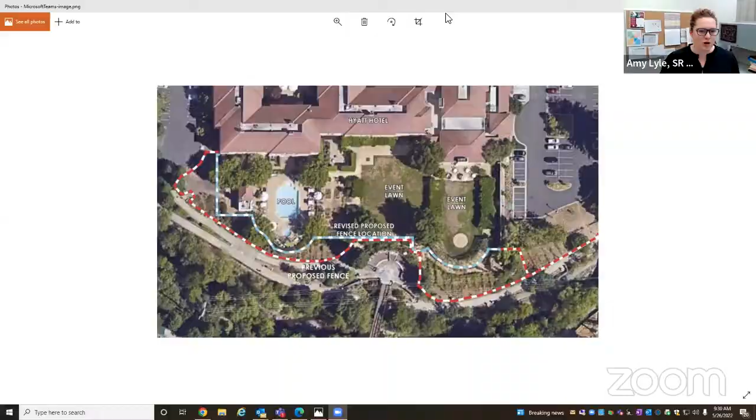It's really nice getting feedback like this, Amy. Right? I really appreciate it. Great. Well, we'll continue to do that. And I think with the more controversial projects, we'll continue to write up a memo to forward on to the review authority that will occur after you.

And one more point of clarification that I forgot to mention during department reports is we are going to move to having memos describing the projects before you versus staff reports. So we're going to try this out. Let us know if it's the right amount of information and detail. Because your committee sees projects in a preliminary way, a lot of times it's very conceptual at the time that you're reviewing projects. It is challenging to write a full staff report and provide that full analysis because strategically this committee, you want to be early in the process to be able to form the comments for staff for their review. So we want to go to memos, and that will help streamline the work for staff as well.

And just let us know at any point if there's not enough information, or before the meeting, we can always, of course, anticipate what information you need or questions, so we can get the right amount of information for you to be able to provide comments. So on today's item, you'll see that change occurring where it is in memo form versus staff report. Well, thank you, Amy. That's very helpful. Any other questions on that?

Yeah, I do, Steve. So I'm looking at it right now, and since this is kind of a short memo because it's just proposing, it's a project we've seen before, and there's just some changes on it. The information that pertains to our committee, is that information going to not be on there anymore? It is. So you mean we should be including the watershed and the watershed map? No, I don't mean that. I mean, there's specific things within the creek manual that apply to this project. And then there's information about setbacks, but this one doesn't have that. But when it does have that issue, is that going to be in the memo?

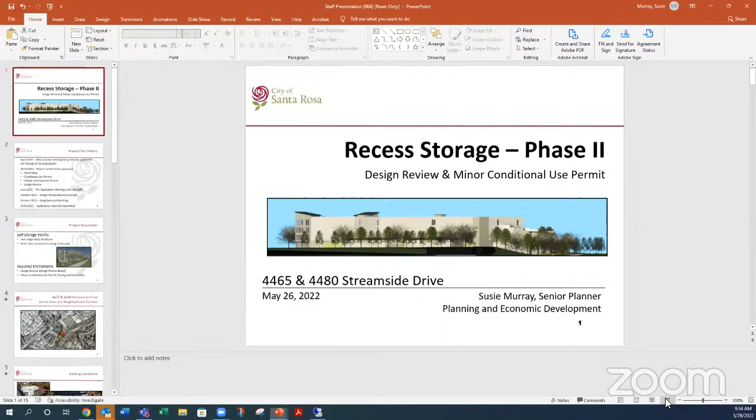It looked like you were looking at my calendar from my screen.

Anyways, before I get started, I wanted to comment on Steve's updates. First, when I heard the creek ribbon cutting, it made me miss being in the water department, being part of the water department team. But then I'm so happy for Alistair, and he will be so missed. I've done a couple of creek cleanups with him myself, and got a tour going underneath City Hall, which was some amazing nasty stuff, but it had some amazing art as well. And Alistair was just gifted in touring us through there.

So anyways, with that, I'm going to bust into this and say good morning, Chair Rabinowitz and members of the committee. The project before you is the recess storage phase 2, we're calling it. It is a project that was before you once before with a different address. This is a new street or an extension of an existing street now. As a result of the previous project, it's at 4465 and 4480 Streamside Drive. It was before you back in April of 2019. At that point, it involved a large 4-story self-storage facility and 2 residential units, one facing the creek.

And that property is really the one that is the reason that we're before you today. That project involved a conditional use permit, a hillside development permit, design review, and of course a map, which is how we have extended the street. This application that revises that project came into us last June. Actually, that's when we first saw it with staff with a pre-application meeting, and we actually got the applications. It's kind of been a spread over 2021 and 2022 because there were some clarifications needed on what applications and materials were required. The Design Review Board has seen this on a concept basis as well. And now we're looking for comments from you on a concept basis.

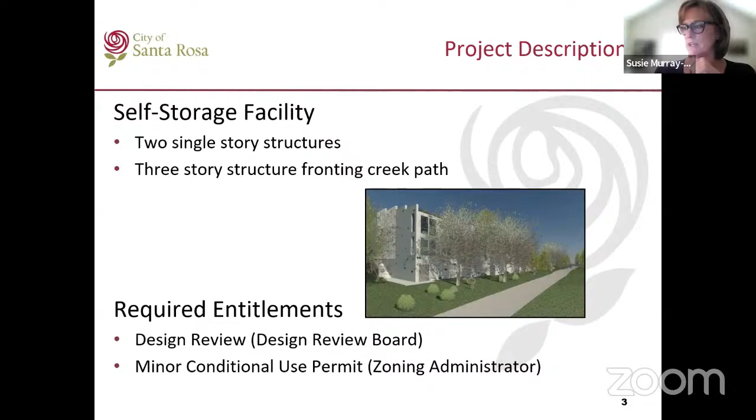And you know what, I'm just noticing right now that this is not completely accurate. One of the holdups at the application submittal phase was a determination on whether or not they would require a hillside development permit. And because the footprint of this structure versus the previously approved residential structure is a little bit different, they are required to go through and get a new hillside development permit. And due to setbacks on the other property on the north side of Streamside Drive, they're also required to have a variance. I apologize, this presentation was made a while ago.

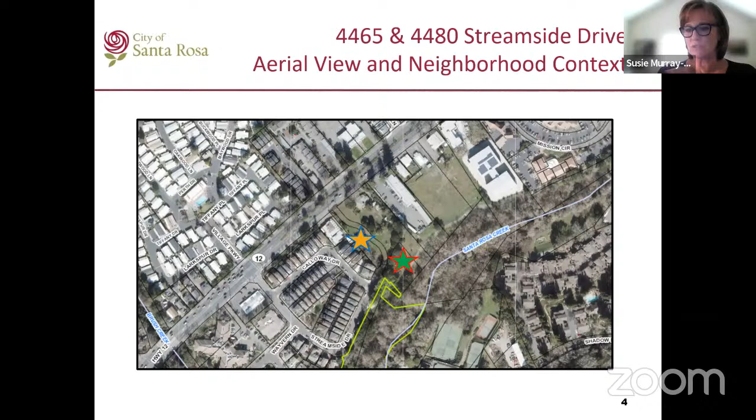Just the orange star, sorry to interrupt you. Is that a residential building? No, the orange star, let me back up here. That's a vacant parcel right now, but it's directly adjacent to residential. So right where this orange star is, they're proposing 2 single-story storage units. Okay. Thank you. And then at the green star, thank you for letting me clarify that. The green star here is where, at the top of the slope, it'll be 2-story, and then it steps down and creates a 3-story structure adjacent to the creek. Thank you, Susie. You bet.

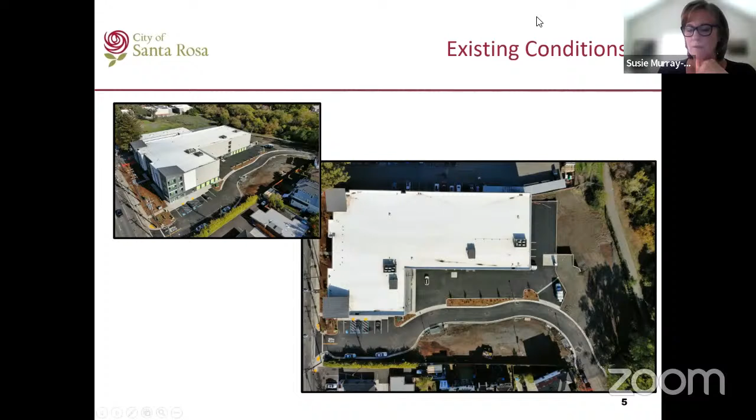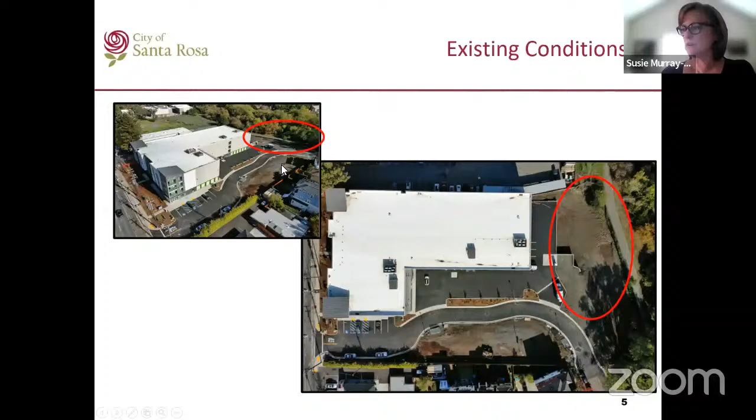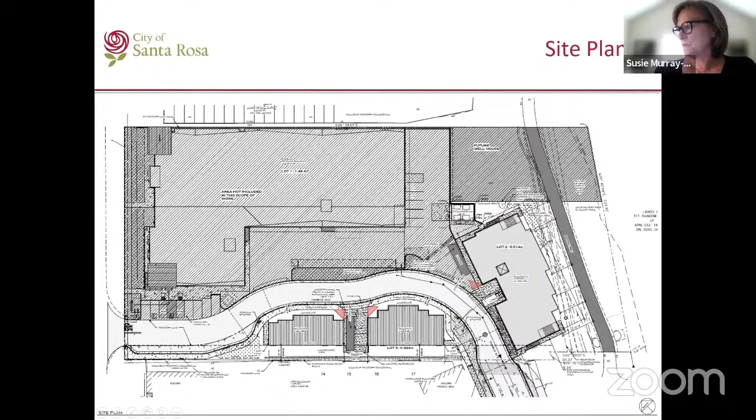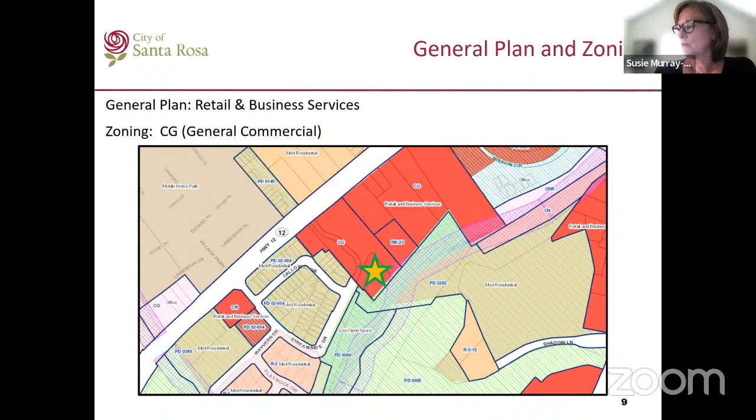And with that, the Planning and Economic Development Department requests that the Waterways Advisory Committee provide comments and direction for Recess Storage Phase 2, a proposed self-storage facility at 4465 and 4480 Streamside Drive. I do have a creek cross section and setback exhibit for you if you'd like. I know that it was from the previous project, but I thought that might be helpful.

Okay, do we have the applicant here? And if so, if they'd like to make a presentation, this would be the time to do it. Yeah, they won't be making a presentation. Their engineer is here to answer any questions that you have. Okay, fair enough. Questions by the committee for staff or the applicant? Carol.

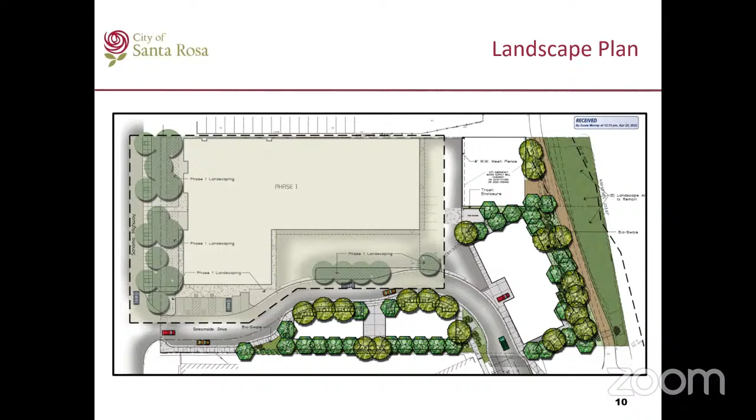And I'm no expert on native plants. My first job was working at a rose garden. So I do have some background in landscaping, but can you put the palette back up?

I guess it's hard to read all of this. The Carex pansa down at the bottom is native. The Ceanothus, I'm not sure where that is. Looking for it. Second column. Yeah, there it is. That's native. And then Baccharis, wherever that might be, is, yeah, no, that's not the same. No, the bottom right, Pigeon Point. So I guess, but this went through this.

So I guess my concern is that there were changes made to the landscape plan from the first time when we reviewed it. Is that correct, Susie? I couldn't tell you for sure. I have not compared the two, and they're not required to plant native. They're pursuant to the city's water efficient landscape ordinance. There's quite a few Mediterranean plants that are also allowed, and we see these in a lot of landscapes. Yeah, so I have not compared the two. This is being reviewed based on its own merits. It's a brand new project.

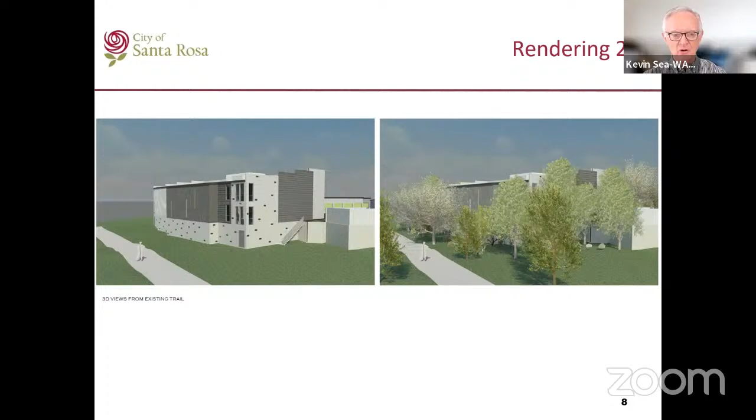On the rendering, it looks like there are windows at one end of the building facing the creek, which I love because of our goal of eyes on the creek. Are there any other windows like those thin strips that we're showing, or maybe those are just decorative and not windows? And are there opportunities to add any more windows? Again, with the idea of eyes on the creek. The project looks great, and I'm just disappointed that we don't have eyes on the creek that would have been provided by the residential facility. So any possibility of more windows?

But isn't that contrary to a storage facility? I mean, people are only there to pick up their stuff and leave, right? I don't know if it's that important for a storage facility. That's just my opinion. Yeah, I think you're right, probably. Yeah, but anyway, I thought I'd pose the question. And Eric, I don't know if you can address that.

It may not be the same level of visibility that a residential building would have, but it's certainly an improvement from a vacant lot. Just my thought is having the public road extending through this property is helping with visibility, and having the presence of a building and people using the building helps with having eyes on the creek. All right, thanks. Anyone else?

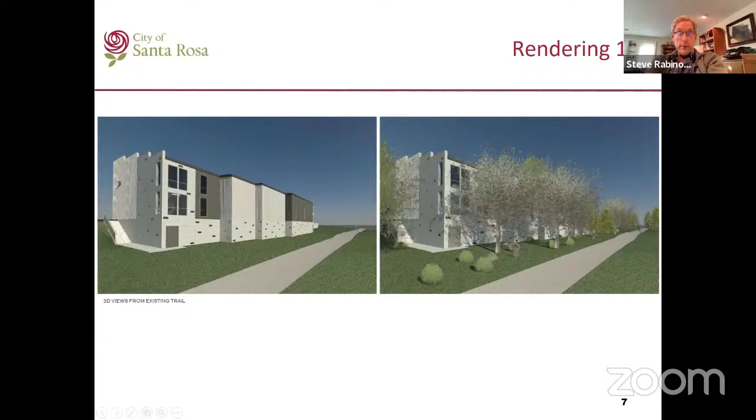Okay, I'm going to open public comment on this item. Is there anyone in the audience, as it were? Doesn't look like we have any participants on Zoom other than our applicant. Okay, so this is time for comments. Who would like to go first? Yes, please. Go right ahead, Mark.

There we go. Yeah, I wanted to jump in here. Now, this stretch of Santa Rosa Creek is considered a natural reach, correct? That's how it looks. I think it's called West or East 3 or something like that. The Reach A West, that's it.

Is that a natural reach there? I believe it is. I believe it is. It is not culverted, but, right, Steve and Kyle might know. Yes, I would consider it a natural reach. Yeah, it's a very nice reach. I was over there yesterday checking it out.

So I don't know if this kind of grades over into comments, but I wanted to mention that I was going through the creek design guidelines, and it says that multi-story buildings must be stepped back from the creek. Single stories only are permitted directly adjacent to the creek. Buildings over 3 stories must have a minimum of 3 steps rising from a single story at the creek edge.